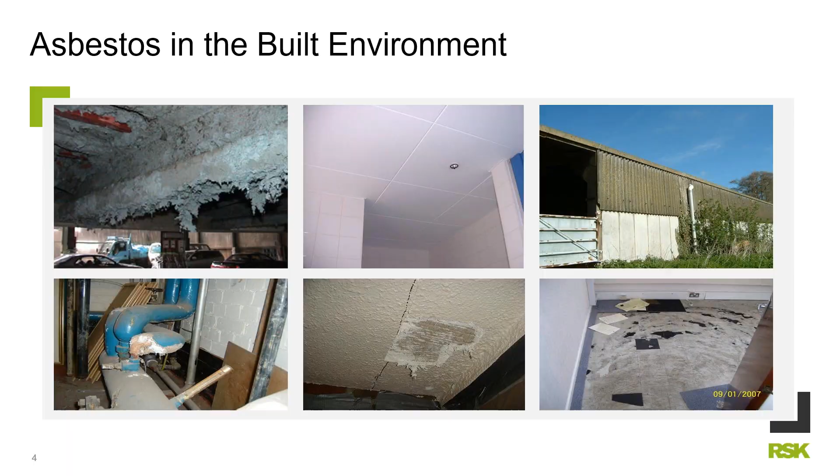One of the things that we've been coming across more commonly in industry for a period now, I think it's fair to say, when I'd first started in the industry, there were known issues in some areas of brownfield development with asbestos associated particularly with manufacturing, this kind of thing. But by and large, people's focus was on the built environment.

We can see this when we look at the Control of Asbestos Regulations, which are focused very strongly on the built environment and indeed the non-domestic aspects of it, etc. Does that mean that asbestos is just a problem in buildings?

Well, no, it doesn't. One of the things that we have found as quality of site investigations have improved over the years is that the more you look for asbestos in brownfield sites, the more you find asbestos in brownfield sites. Some of the straw polls around industry say that somewhere between 70 and 90%, 80%, something like this, of all brownfield sites are impacted with asbestos in made ground at some level.

And that really can go from the sublime to the ridiculous, from a single cement sheet to some areas which have really almost geological quantities of asbestos present. A couple of reasons for this, which we'll dig into in a little bit more depth. Partly, at least, the legislation in the past wasn't as strict as it is today.

It was also common industry practice here, particularly on heavy industrial sites, that if asbestos was removed, it was disposed of on site, it was buried, it was used in building up bunds for earthworks, all this kind of thing. Asbestos wasn't always removed before structures were demolished.

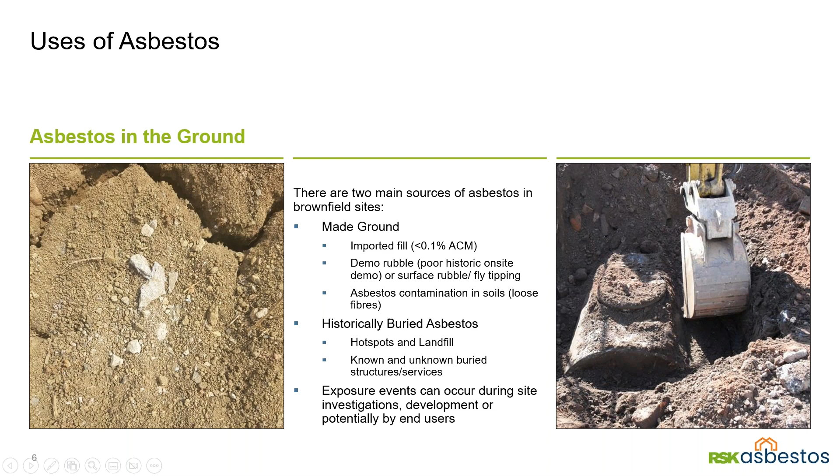Exposure events associated with asbestos in the ground tend to occur during site investigations, during development, or potentially by the end users. It's very much the same kind of pattern that you see with asbestos in the built environment, in that in order for there to be exposure, negative health impacts for this, by and large, you need to have some kind of activity which is disturbing the material, raising it to the surface, or indeed raising it into the air, causing elevated fibre levels and potential exposure routes by that means.

In common with the built environment, there are different risks associated with asbestos in made ground in brownfield sites. So it's not the case that all of these materials pose the same level of risk. At one end, you have asbestos insulation, loose fill type materials, which are very friable, very high asbestos content, much greater risk of these generating elevated fibre levels. On the other end, you have the question of reinforced composites, and the single biggest use of asbestos in the UK historically was as asbestos composite sheeting and Big 6 type sheeting, which is what almost every farm building from here to wherever you care to look at is made out of.

This is something that is recognised and reflected in the legislation. Question of licensing is something that we will come on to later on, but higher risk materials can only usually be worked on by licensed asbestos contractors. Lower risk materials, there are other alternative routes here, although the risks from asbestos should always be assessed appropriately.

The other thing which is common in made ground, in brownfield, not in the same way in the built environment, is the question of free fibre. This is something that tends to have arisen over time through physical degradation of asbestos-containing materials, but it's also something that quite commonly comes up as a legacy from manufacturing. I mean, there are various sites around the country where asbestos-containing materials were made, and there's quite an element of contamination by free fibre in the soil on those sites in some instances to this day.

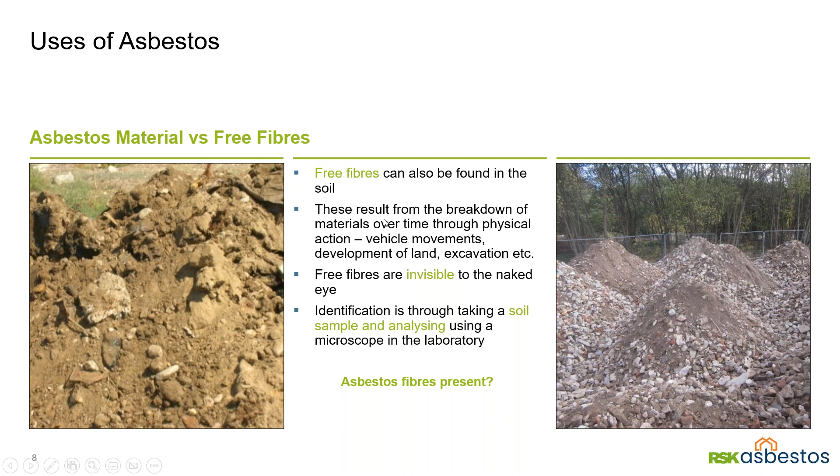Talking about the issues associated with brownfield sites, one of the first occasions that this usually becomes an issue or becomes apparent is during site investigation phases. Again, there's been a great improvement in these over the years. One of the commonly used techniques in terms of the investigation and classification of the site is to look at high, medium, low, red, amber, green, traffic-lighted type approaches.

Slightly oddly, as I was preparing this slide, I did notice that on some occasions these are called red, yellow, green, sometimes red, amber, green, sometimes high, amber, green, etc. Same principles apply. You have some sites which are at much higher risk of having more potentially risky non-bound ACMs present. Manufacturing sites, disposal sites, rail yards, power stations, ship manufacturing, shipyards.

That's the kind of thing that you would expect is going to be picked up as part of pre-planning, and it is the kind of thing that you would expect to have some impact on site investigation techniques. There's a potential that these sites might be licensable, that you might need additional support from asbestos consultants or from licensed asbestos removal contractors or similar. Also heightened onus on control measures of dampening down and so on.

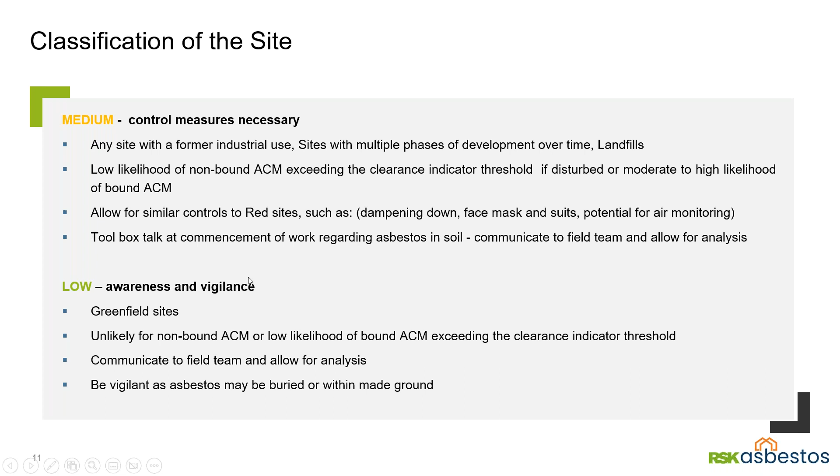So if we flip back to the amber and red sites and what mitigations might look like in the site investigation phase, and these same measures could be applied to development phases as well, you're potentially talking about watching briefs, the use of PPE, of RPE, dampening down soils, or at least ensuring that soils are maintained damp. We live in the UK and it is quite commonly damp, but a couple of weeks or months ago this was not necessarily the case. Some techniques are probably immediately indicated against. Air flush drilling is a classic one.

There's also ensuring that inspections are undertaken before ground is broken, making sure there is appropriate onus on awareness, and that the workforce undertaking these works are appropriately trained, equipped, and know what the procedures are.

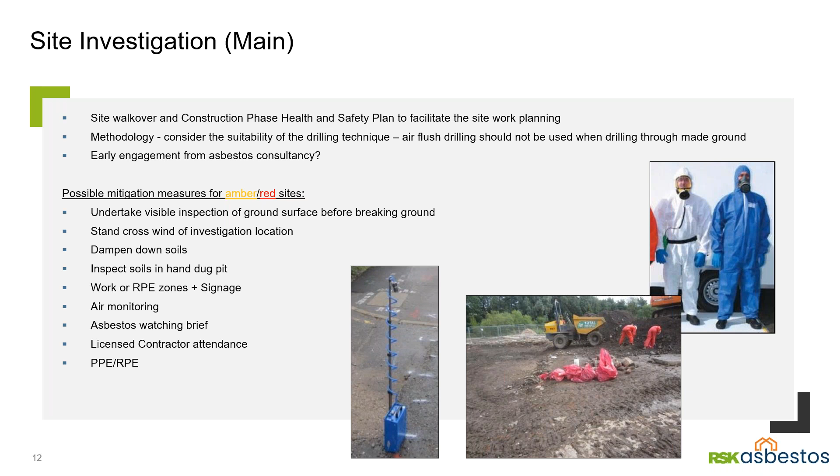Question of PPE and RPE comes into this. We've got a photo there which is from a site investigation that we undertook a couple of years ago. One of the things that you can see there, people will be familiar with type 5-6, category 3 overalls, your paper suits, etc. Using simple things such as blue rather than white coloured suits on these can make people a lot less visible from the point of view of concerned local residents, etc.

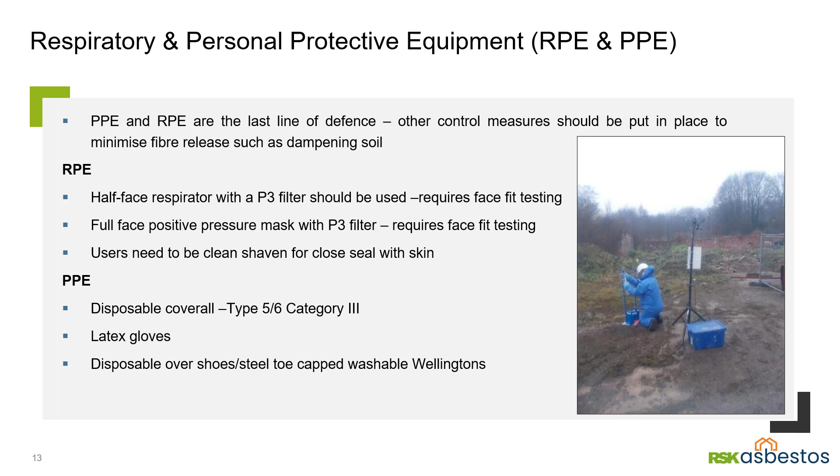Makes you look a little bit less like CSI, and people tend to ask where the body is buried a little bit less on that basis. Blue blends into the background. Similarly, RPE, appropriately fitted, appropriate filters, etc. And a question of footwear. And again, expanding that view a little bit.

Now, this is a red site. The site in particular here is very much at the red end of red, so hence the uplifted levels of control measures and monitoring that are in place here. But just to show that these are things that are used in real life and are manageable. They are procedures that we should be looking to follow.

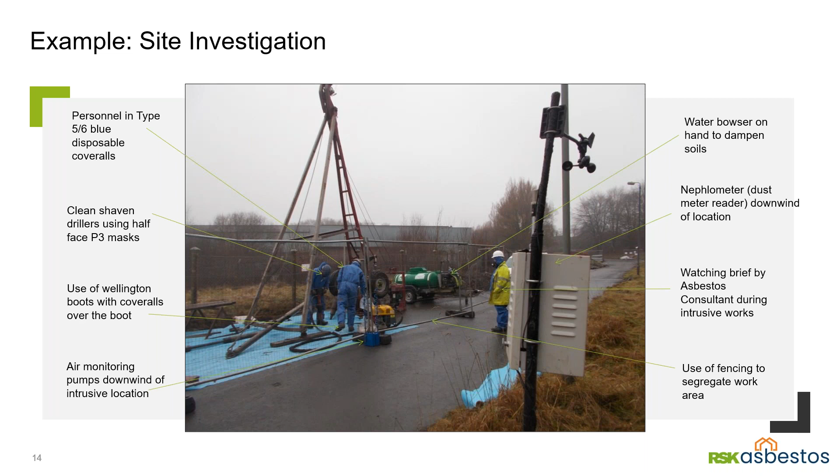Mentioned question of take-homes earlier on. I think this is probably the other main take-home that I'd like to bring forward if we can. If there's one thing that people do get from this, the question of appropriate sampling techniques is one of them. There are effectively two different sampling techniques used when we're talking about asbestos in the built environment and in brownfield.

The first one is the one that people would probably be more immediately familiar with, question of bulk sampling. It's where visible pieces of a suspect material are collected from site, and that can be a site as in a building, it can be a site as in a brownfield construction site or similar, and these are submitted to a UKAS accredited lab, which would undertake bulk sample analysis, and they determine the product type and which kind of asbestos material is present. Now, it's important to note that that is for visible pieces of suspect material.

The second item that we have in there is the question of soil quantification, whereby a soil sample is taken with or without visible ACMs being present and subject to analysis again by a UKAS accredited laboratory. Limits of detection are low on these. It's possible to detect a very, very low level of asbestos content, possibly at a level where it's not realistically going to be causing any enormous impact onto site works, but also commonly in a manner which can give us very useful information.

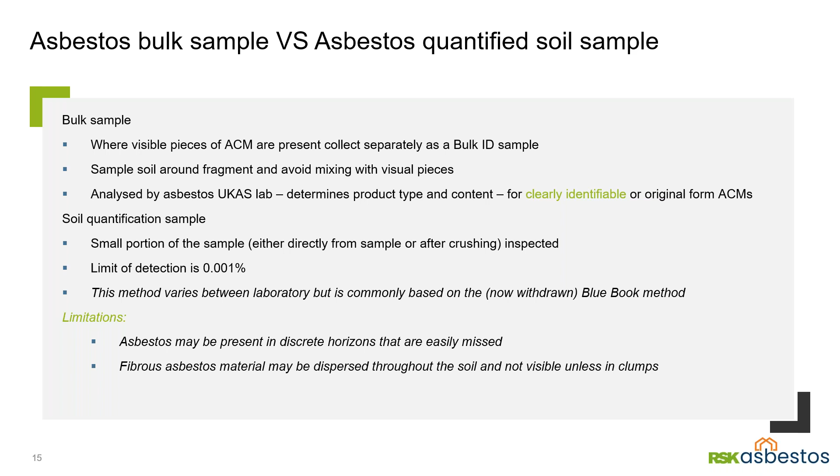I mentioned the question of training as an absolutely critical part of works with asbestos impacted soils. Realistically, I think we should be expecting that in the same way that anybody who's working in the built environment should have asbestos awareness training as a bare minimum, anybody who's working in brownfield sites should have asbestos awareness targeted for ground workers as a minimum measure to ensure that they're able to assess works appropriately.

There are also other levels that go in there in terms of licensed or indeed non-licensed training for ground workers. There are bespoke trainings that can be put together for specific sites, question of face fitting, etc. as well, which all goes into that kind of aspect.

Questions of licensable work in the soil, much the same as they are in the built environment in broad terms. You have higher risk activities, licensable works, which works on asbestos insulating board, insulations, coatings, or debris derived from the above, or works which are liable to breach a control limit.

You have non-licensable works which are outside of that, and just because the HSE like to have 3 categories if you get the chance, or 4 if 3 aren't good enough, or 5 if etc., you have this middle category of notifiable non-licensed work. It's slightly difficult to see how the question of notifiable non-licensed work might fit into the ground, but that's a different argument to a certain extent.

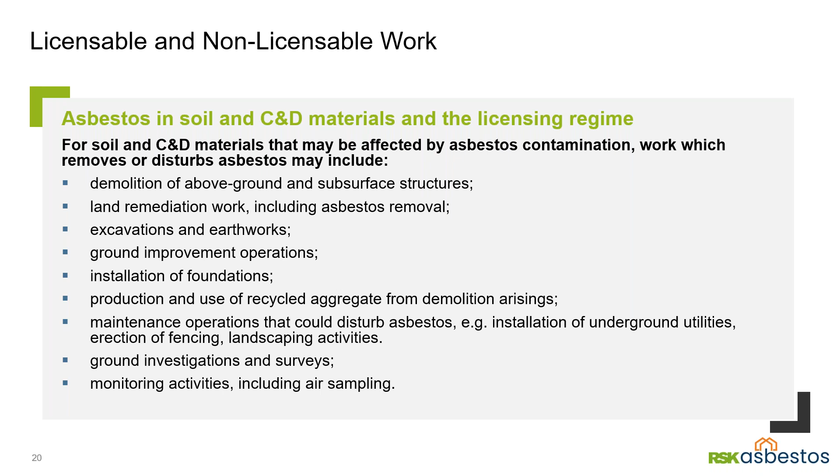In the same way that works in the built environment might fall under the licensing regime, works on soil, brownfield sites, C&D materials, made ground, etc., can disturb asbestos, can remove asbestos, and can also be considered under the licensing regime. I have some examples of this here, from ground improvement operations to production of recycled aggregate to demolition of substructures, etc. Remediation, construction in broad terms.

The question of ACMs in the made ground. Now, we started off the presentation with some slides which dealt with the question of ACMs in the built environment, and they're the things that people classically come across as part of asbestos awareness training, textured coatings, asbestos insulating board, ceiling tiles, asbestos insulations, etc. Now, any of those materials can make their way into the ground, indeed do make their way into the ground through a variety of different means as described previously.

One of the things that it's always important to consider is the competency of people who are undertaking works, whether that's consultancy works, whether it's site investigation works, whether it's earthworks as part of a development, whatever they happen to be. And it's important to consider, if we are talking about ACMs in the made ground, that the way that they present themselves is not necessarily typical of the way that they would have presented in their original form in the built environment.

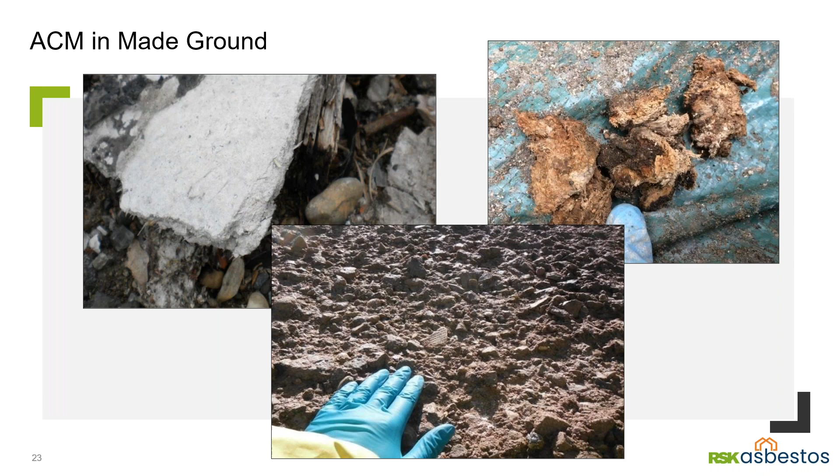It's also very important to check the competency of anybody you are employing, or any of your contractors, subcontractors or similar who are undertaking works of this kind, checking that people are familiar with working with asbestos containing materials in made ground as opposed to solely in the built environment.

It is the case that the presence of asbestos containing materials on site is going to affect options appraisals. It's going to affect an options appraisal with regard to the end use, with regard to the potential development routes, with regard to the potential treatment options for other contaminants there. Broadly speaking, they're the same kind of management options in place as you might expect in the built environment in any case. There's a question of leaving asbestos in situ.

There's a question of removing asbestos from the soil and treating, or from the made ground and dealing with them separately. And there's a question of bulk removal of asbestos, including made ground. It can be possible to reuse materials on site with appropriate controls in place. It can be possible to treat on site or indeed off site.

I mentioned briefly the question of whether materials are visible or not. The relevance of that, realistically, is that if you have a fibre content of more than 0.1% weight for weight, then waste being disposed is going to be considered as a hazardous waste from the point of view of asbestos alone. There may be other contaminants in there as well, of course. Or indeed, if there are visible asbestos containing materials in a waste, that is going to fall as a hazardous waste under the hazardous waste regulations.

If we're looking at the question of leaving materials in situ, you need to consider the works that are going to be proposed. You need to consider the end use of the land. There are occasions where it would not be appropriate to leave asbestos containing materials in situ: public open spaces, residential gardens, this kind of thing. There are other occasions, particularly major infrastructure projects, where it may be entirely appropriate to leave ACMs in situ and maintain them where they are. It can be appropriate to look at capping layers, including visual warnings, hard to dig layers, etc.

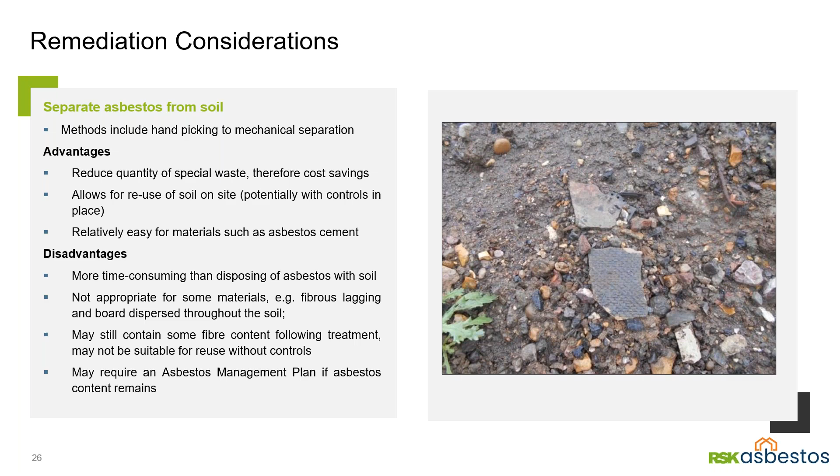The other option is the one commonly referred to as dig and dump. It's certainly the quickest option, but it can also be the most expensive, and you then reach the question of what do we do after we have dug the asbestos and impacted ground from the site. Where's it going to go? It's worth bearing in mind remediation of landfill and the like, and the fact that quite an amount of the asbestos impact in made ground in the UK is associated with previous disposal, and each round of disposal effectively acts to dilute the waste. Even with inadvertent mixing of capping layers, you end up with a lower content but larger volume of waste.

So at some point, and there are various thoughts around this in industry at the moment, there is a question of end of life of asbestos product. We're not at that point at this moment. Is dig and dump an appropriate way to deal with an impact on a particular site? Well, yes, it can be, but it certainly shouldn't be the immediate go-to. There are other options as well.

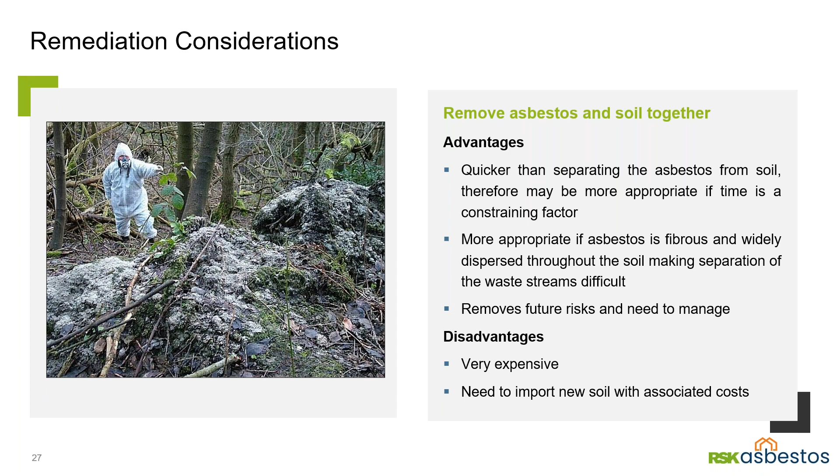Control measures during remediation, in any case: in the same way that we'd expect control measures during removal or abatement of asbestos-containing materials in the built environment, you would expect similar in the brownfield context. You wouldn't necessarily expect enclosures to be used, although with pieces of retained estate that might be appropriate, but you'd certainly be looking at control of works, working in accordance with CAR 2012 and so on.

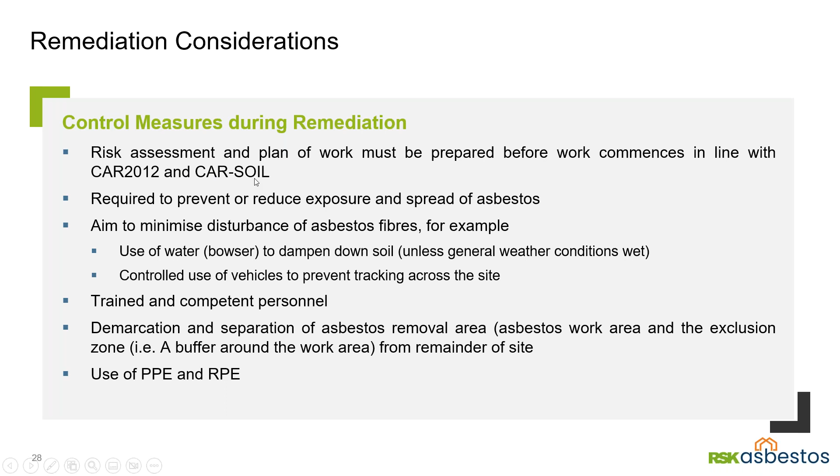Controlled entry exit points, decontamination of equipment, question of monitoring, perimeter monitoring, high volume perimeter monitoring, potentially looking at driving down limits of detection, etc. And question of concerned or sensitive receptors in surrounding area, again, is something to be strongly considered there.

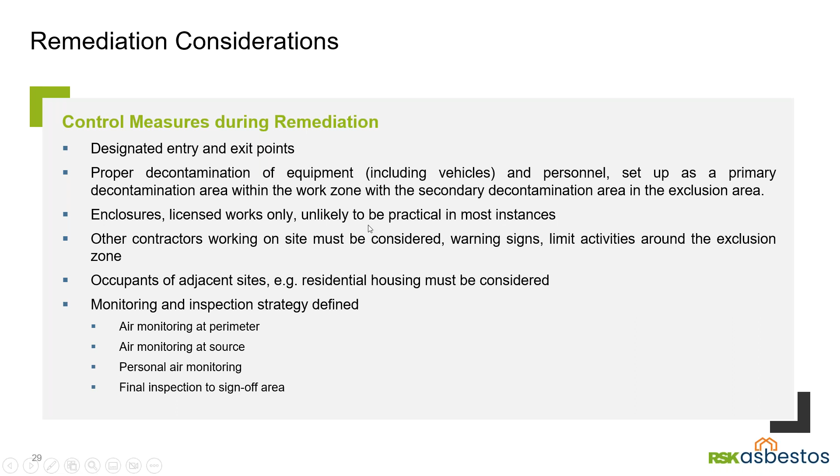Final couple of points, really, not one that I necessarily thought illustrating by slides is going to be the way to go forward, but looking at the question of consequences of failure to consider asbestos-containing materials on site during development as part of brownfield investigations, etc. Because of the nature of the materials, because we know that they are liable to be present at some level in a large number of brownfield sites, it is quite possible for programs to be put in place at the beginning of a development which are not necessarily taking into account all the potential consequences of later discovery of asbestos-containing materials, being worked on, or asbestos-impacted soils being worked on in a manner which causes a spread, for example.

And it's entirely possible, leaving aside the obvious legal and indeed moral consequences, for the financial consequences to be quite considerable. If you think about the question of a waste material being classed as a hazardous waste material if it has a visible asbestos content to it, it's quite easy to see how a stockpile of crushed material or a stockpile of made ground or of whatever it happens to be can turn quite quickly into a stockpile of what is potentially waste material and potentially a hazardous waste material because of the asbestos content there, and the costs can increase really quite quickly on that.